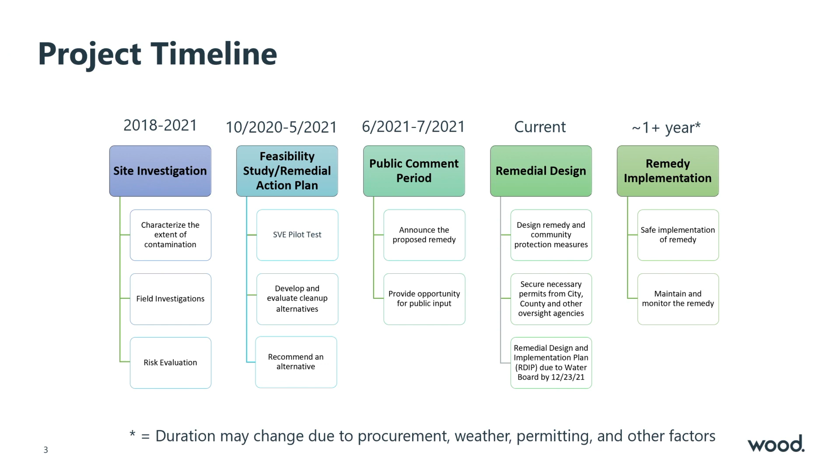Hello everybody, my name is Hui Li, and I'm the design engineer of the SVE treatment system. I'm going to give you an update of the detailed design and also our planned implementation. As you could probably tell, English is not my first language, so if anything sounds unclear to you, feel free to stop me and ask questions. I'm more than happy to clarify anything for you.

As Mike mentioned, based on previous investigation and risk evaluation, it has concluded that some vapor intrusion is happening at some of the houses in your community. So in addition to temporary solutions like distributing air purifiers, we are working on a long-term solution to remove VOCs from below ground and prevent vapor intrusion. After evaluating different technologies, the Water Board has approved soil vapor extraction as the remedy.

So back in June of this year, the Water Board presented a conceptual SVE system layout to you. We did receive multiple comments about negative impact to the community and other concerns, and since then we had to go back and work on the detailed design and revise our design. That's what I'm going to give you an update on today.

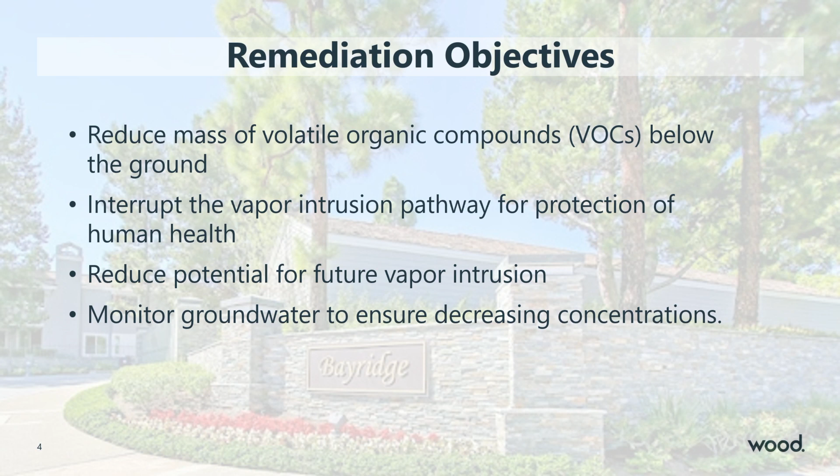So first, just a little bit of recap of what is soil vapor extraction, SVE. Vapor intrusion occurs when VOC vapors below ground migrate into your house, into the building. You can think of SVE like a giant vacuum system, where we use a vacuum blower to extract and remove VOC vapor in the ground using the underground SVE wells. The extracted vapor will be treated by an above ground treatment system and then discharged to the atmosphere under a permit issued by the Air District. By removing the VOCs in the ground below surface, we can prevent the vapor intrusion.

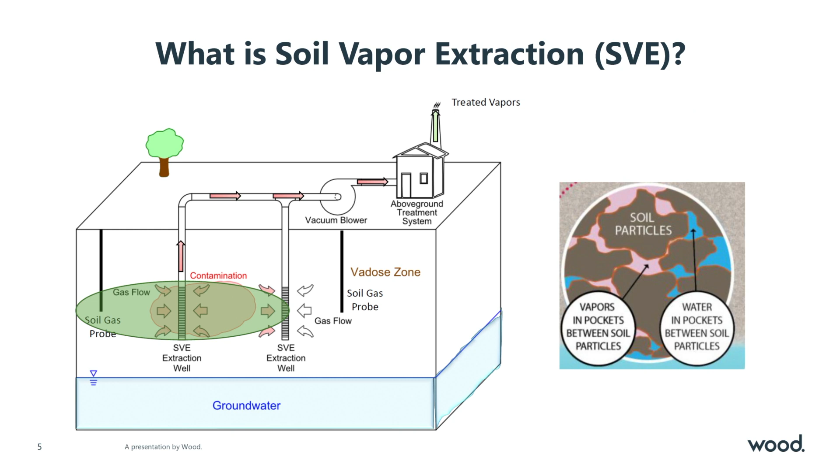So by using the estimated ROI, radius of influence, of 70 feet, we proposed to have 28 pairs of SVE wells throughout the community. We also planned to have 5 treatment systems in your whole HOA.

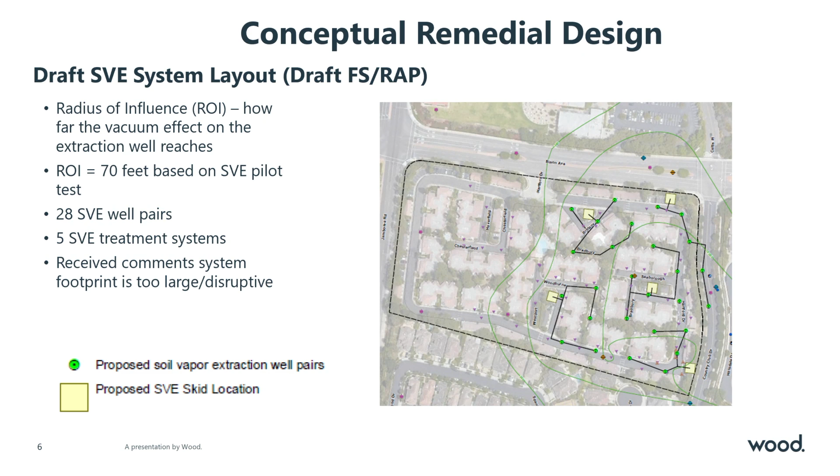During the public commenting period, we received, as I mentioned before, comments from you guys about the footprint being too large, too much negative impact to your community. We did hear your concern, and we went back to revise our design accordingly while also meeting the remediation objectives. I will show you the revised design just in a minute.

So I will just quickly, because I'm an engineer, talk a little bit about our design process. After the remedial action plan was approved by the Water Board, we looked at the pilot test results, picked the suitable flow rate and vacuum, and also calculated the sizes of the equipment and the piping.

In addition, we also run a numerical model to simulate the performance of the SVE system, to evaluate the vapor velocity, and to help us with the detailed design. Now I'll let our SVE expert, Chuck Blanchard, talk a little bit about the modeling process.

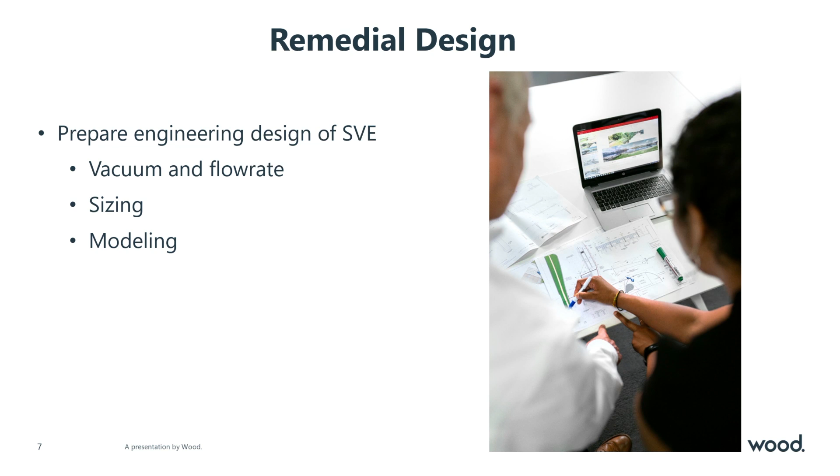Yeah, hi, I'm Chuck Blanchard. Our original analysis of the data just consists of plotting vacuums versus distance from our extraction point. Hui talked about how we have extraction wells at this site. When we ran the pilot test, we measured the vacuums, and they tend to decline with distance, and we plot them out. That's a basic analysis that we did.

So the 70-foot ROI that you saw previously was based on that type of analysis. The thing is that vacuum doesn't actually clean anything up. It's actually the flow of air through the ground which causes the remediation to occur. So the next step we did to get a higher level of analysis was the mathematical model.

The way the mathematical model works is that a modeler will put in the depth to water at your site, the type of wells we're installing, and they'll start to populate that with the data from the pilot test. Then that gets compared to the pilot test. And when all that data agrees with what we generated in the pilot test, the model is considered to be, quote, calibrated. Once the model's calibrated, you can use it to do various types of more detailed analysis of the site.

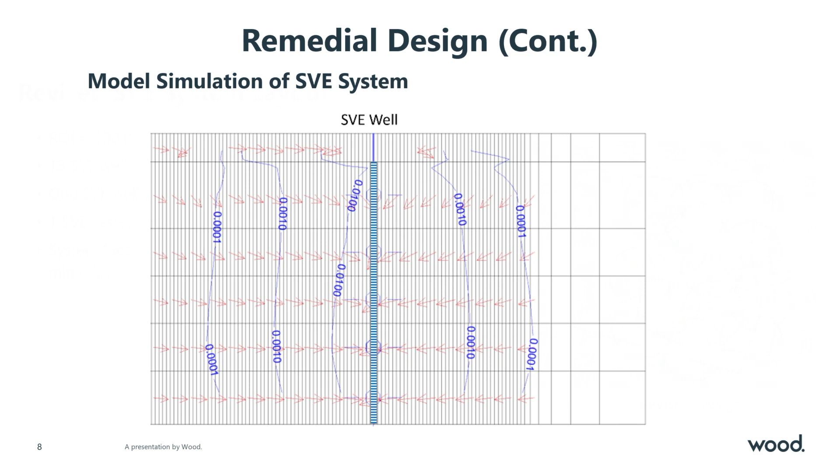So that means instead of 28 pairs of SVE wells, that's 56 wells, we only need 13 SVE wells to cover the same area.

We also decreased the number of SVE treatment systems from 5 to 1. And by working with the HOA, we were able to identify a location for the treatment system.

I think it's probably easier to see on the next slide. It's outside your community walls and next to the country club drive. I should probably have a pointer actually.

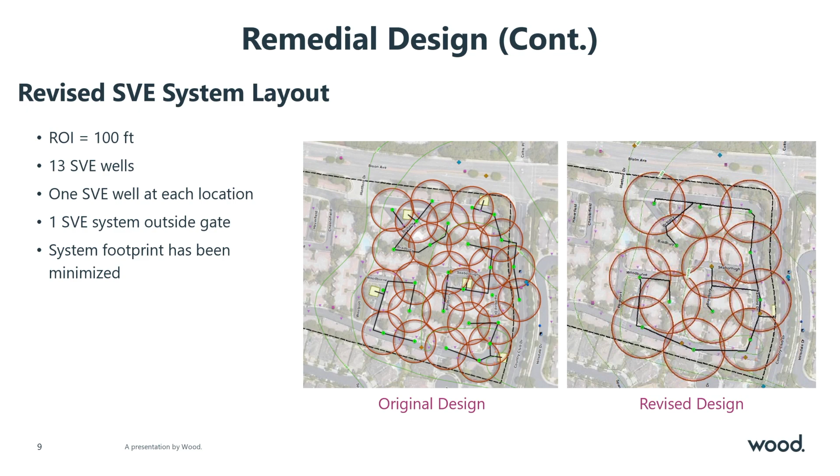Thanks, Mike. So also, you can see the layout more clear without the ROI circles on this figure.

We have a total of 13 SVE wells. This well is the one we already installed during the pilot test, so basically we're only going to have 12 new SVE wells. Fewer wells also means lower flow rates and decreases the footprint of the treatment system.

Also, you can see those dark lines are underground trenches for piping for the SVE system. So there's a lot less underground trenching as well.

So after the revised design is approved by the water board, we will start to implement the remedy. I'm going to walk you through the different steps of the implementation, so you know what to expect.

The first thing we're going to do is run an SSD pilot test at one building in your community. SSD, subslab depressurization, is a contingency remedy in case the SVE system doesn't prevent vapor intrusion effectively in some areas. The reason we're doing that first is because it has smaller impact to the community - it's only one building, and the test will only last less than a week.

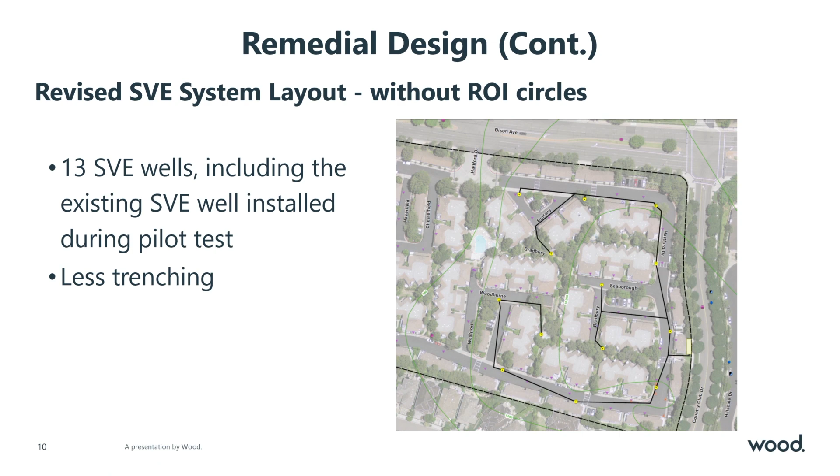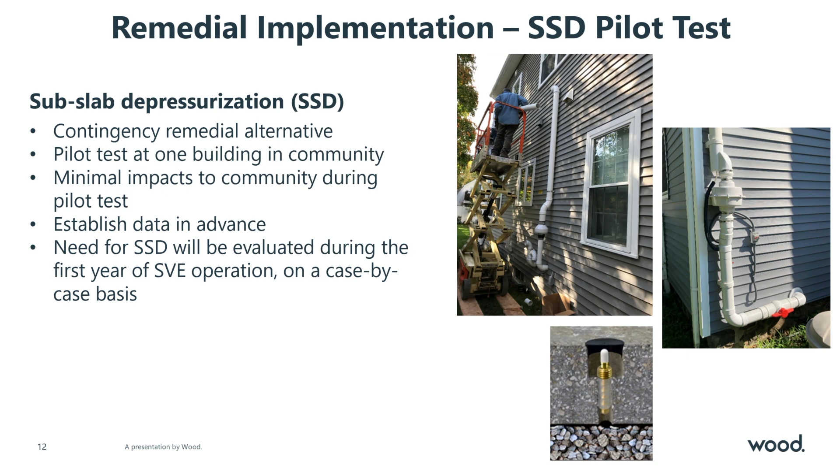I think I'll just finish up about the SSD system. We are going to evaluate the need for the SSD through the SVE system operation, and assess each building individually to see whether it's needed or not. Like I was trying to say, we are running the pilot test first, so we will have the parameter data and design data if we need it installed.

So after the SSD pilot test, we will start installing the SVE treatment system. The first step is installing 5 groundwater monitoring wells to monitor the decline of VOC concentrations in groundwater. As you can see, those yellow dots are 4 wells inside your community, and one outside your community on Bison Avenue. On the left is the typical drilling rig, which you've probably seen before.

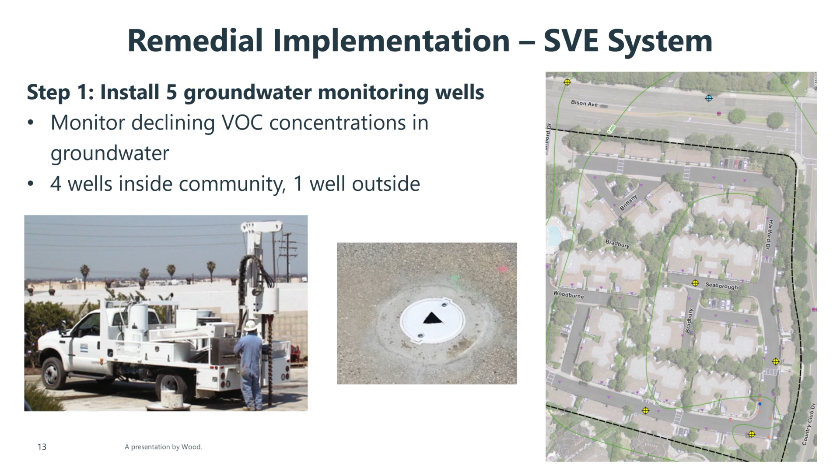The other figure is the finished monitoring well box. After installation of the groundwater monitoring wells, we're going to install 12 new SVE wells. On the right side, the picture shows the SVE wells installed during the pilot test, and we're going to reuse one of them. On the left, the figure is the typical wellhead or well vault of the SVE wells.

We have piping, valves, and vacuum and flow rate monitoring devices. As I mentioned, we are still finalizing our design, including the well boxes.

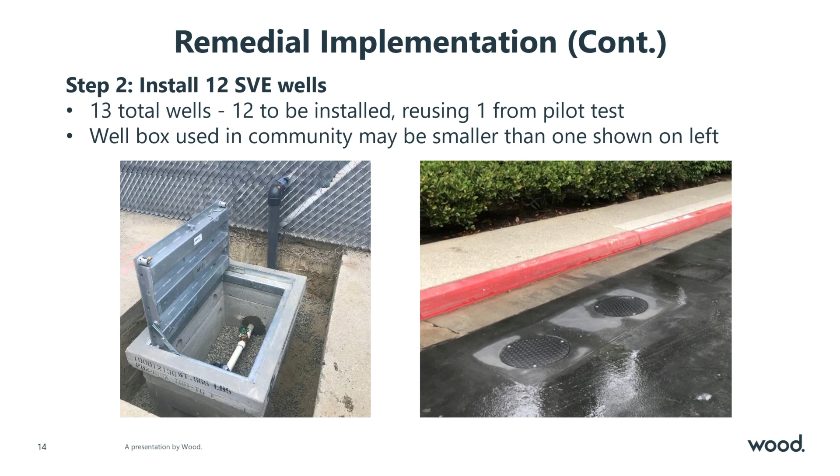After installing the SVE wells, we're going to put in the piping connecting them. Those two figures show typical trenching, piping, and backfill for installation. After backfilling the trenches, we are going to restore and repair your surface, either by repaving the entire road with 2-inch asphalt, or if the trenches go through a landscape area, we will resurface it to match the existing landscape.

I just wanted to add one benefit of the revised layout: we have very limited and minimal impact to the landscaped areas. That was one of the issues with the original design, where we had to go in between houses for long runs. So most of this work will be done within the roadways, sidewalks, and things like that.

Just a basic question on when you do this work installing the piping: will we have access to our garages, the roads? If not, how long not?

Yes, you'll have access. There may be diversions and partial lane closures, but the process should be pretty quick. At the end of the day, if anything's left open, they'll put steel plates over it so you can drive over it. There may be a point where we're working in front of your driveway where we may have to limit or restrict access, but we'll communicate that with each of the property owners.

I think the other thing is we'll be sending out a work notice beforehand, and we're perfectly happy to have some type of virtual meeting if you want to hear the nuts and bolts. You'll be notified well in advance, and we'll work with your schedules to make sure it's not too impactful.

I think we're getting close to the end, so thanks for hanging in there.

So after... oh wait, we have one little question here. Hang on one moment.

After we install the piping connecting the wells to the treatment system, we are going to place a custom structured treatment system building next to Country Club Drive. This is a rendering figure of that treatment system building. We'll enclose all the equipment inside the building and soundproof it, so if you stand about 3 feet away from it, it should sound like a refrigerator.

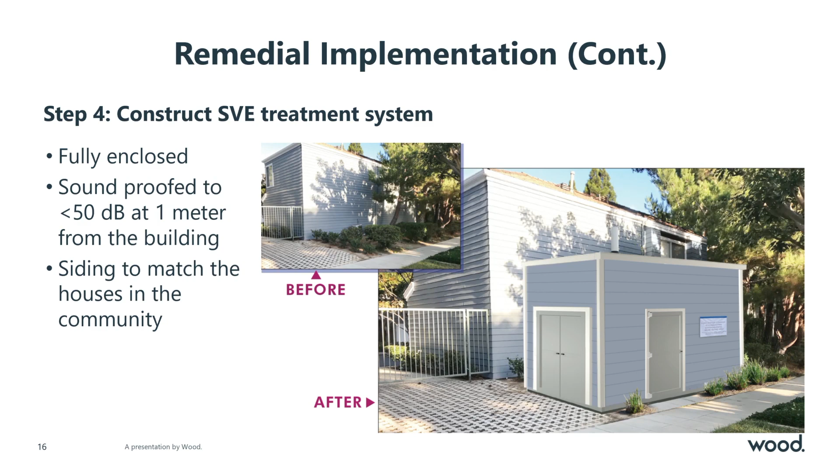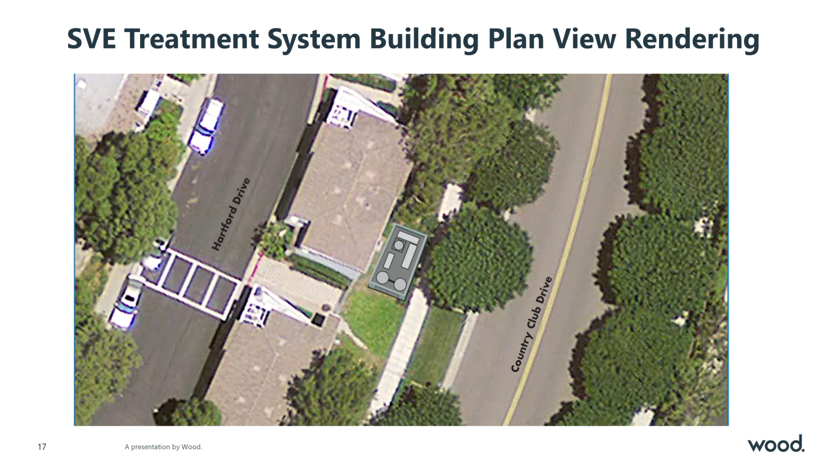After the installation of the treatment system, we're going into operation, maintenance, and monitoring, the O&M phase. For the first week or so, we will start the system up and fine tune it, just to make sure it is operating as designed. After that, we plan to let the system operate continuously for a year. We will come monthly to collect samples to evaluate the performance of the system and show compliance to the permit issued by the Air District. We'll also come to perform required maintenance as well.

In the meantime, we will continue monitoring the groundwater, soil vapor, and indoor air. And after 1 year, we'll turn the system down and collect additional samples for SVE system evaluation.

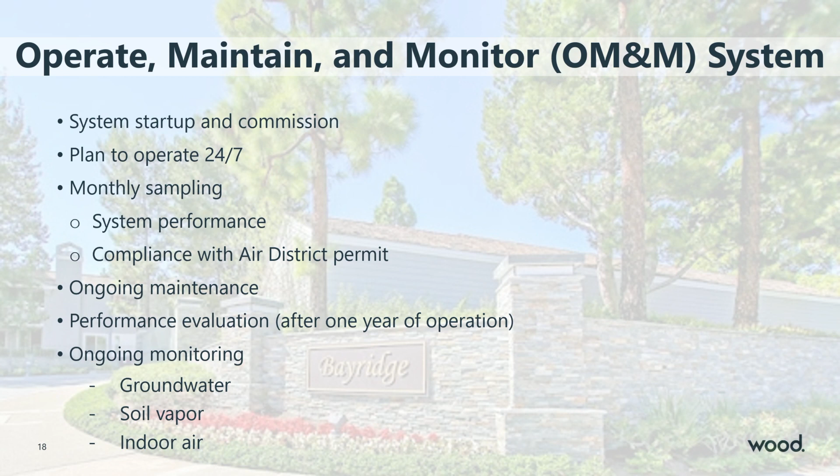We plan to start construction in March, and we will send out the notice of work in advance. We will evaluate whether it's necessary to have another community meeting before that as well. Also during construction, all the vehicles on site will be required for construction only, and all personal vehicles will be parked off site.

When you said personal vehicles, whose personal vehicles are you talking about? The workers' vehicles will be parked off site. Thanks for the clarification. So we're not going to impact the parking here.

Thank you for the clarification. After that, we plan to run the treatment system for a year, then perform an evaluation, collect additional samples, and work with the water board and the community to decide what the next step is. I think that's all from me, and we're happy to answer any questions.

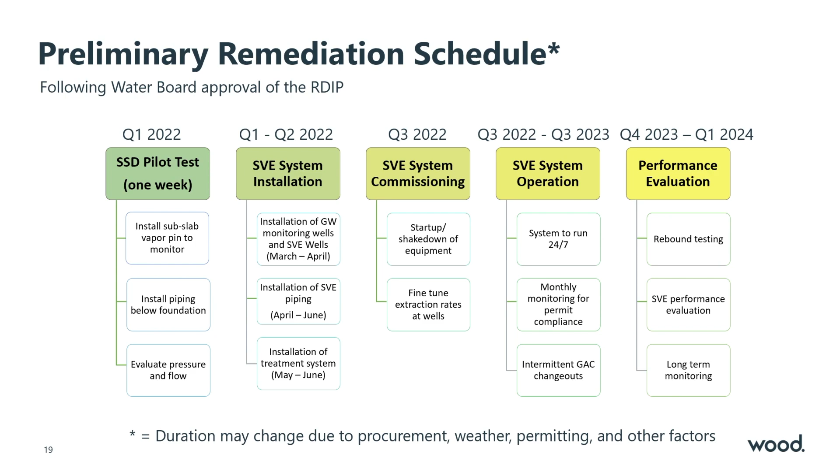I just want to add to Wei's comments. As far as the construction activities shown on that schedule, from March through June, that's the heavy equipment, the actual construction, the period of disturbance, as I'd like to think of it. After that, once the system is running, our presence will be back to what you're used to now, minus the drill rigs. There won't be construction activities, just more foot traffic. We'll be doing indoor air sampling, sampling of the probes in the roads, and monitoring of the system. So that construction activity is limited to that period of time.